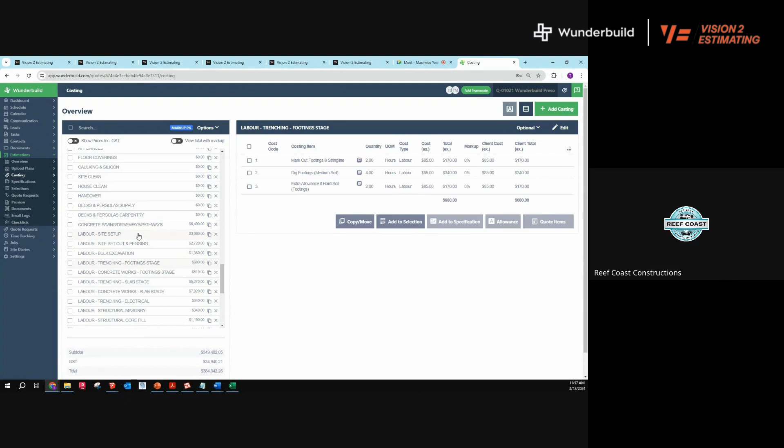When I import that, it's going to add all these categories to the bottom here. But see how every single one of these items is priced, because even though it's brought in the item name from that takeoff, it hasn't overwritten the task name or the costing item, and it hasn't overwritten the quantity item, but it's drawn the pricing from that one SKU code.

So I can go through the whole labor hour price list, and it's just used the one labor rate to price the whole thing. But what I've essentially done is built a task list with hours allowed for all the guys. I've also already pre-categorized the cost type as labor.

So it means that when it converts to a job, if you're using this labor type, guys can come in and assign their timesheet hours to these tasks as well. So this is set up to suit the way that our categories work.

Now, if you're a builder that already has all of your costing categories set up and think, oh, it's a headache now, I'm going to have all this data everywhere and I want to move things around and it's not the same as mine, but you like the idea of it being broken down, what I'm going to show you quickly is how inside the costing to manage things to basically build it the way you want.

So say, for instance, I already had a costing category called concreting works total. I'm just going to go concrete works and add that.

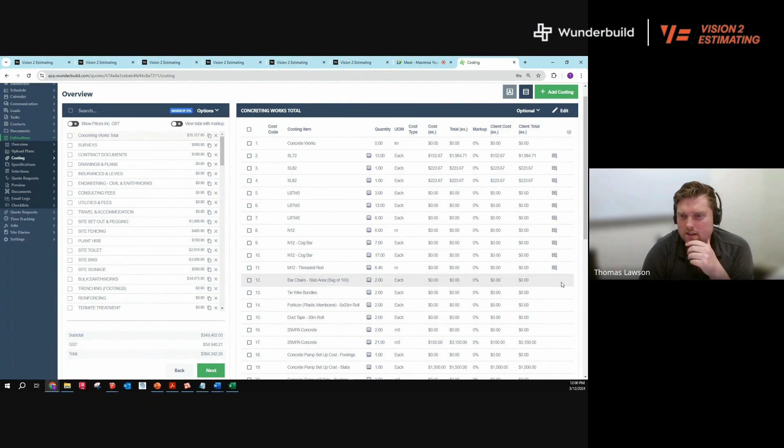So then I can go through and think, okay, inside this category, have I got a reinforcing quote? So I don't need these price items. Am I going to get the concreter to do it, working off his square meter rate and strip footing rate, or is my guy going to do it, or am I going to make an allowance for the concreter's rate plus some extra labour allowance for some of these tasks for my guys to help on site.

So moving it around means that you don't have to sit there and rethink and manually input stuff.

All from within Wunderbuild, what we've been able to do is take a CSV that's takeoff only, matched with SKU codes in my price list. I've been able to build my price list in the context of a job, so I can use it from every step on. I've been able to understand where my price is coming from by seeing the prices broken up into categories. I've also been able to move things around inside the costing overview with the click of a button instead of having to manually drag and drop, type things in, punch things in, or go back to takeoff.

So that's the overall of what I wanted to show of how that works with the estimating of Wunderbuild. But what I wanted to talk to you guys about is how we at V2E come up with this data. So those takeoffs that I showed you on screen and how that works with Wunderbuild, that's what our takeoffs look like. That's how we break things down.

But where do we get that data from? Where do we measure things from? So we don't use the inbuilt takeoff in Wunderbuild. We don't use Bluebeam or PlanSwift or anything to sort of manually do things.

What we do is we take all your sets of documents - engineering, your plans, site surveys, interior finishes, electrical layouts, all that stuff - and we put it together in a working 3D construction model.

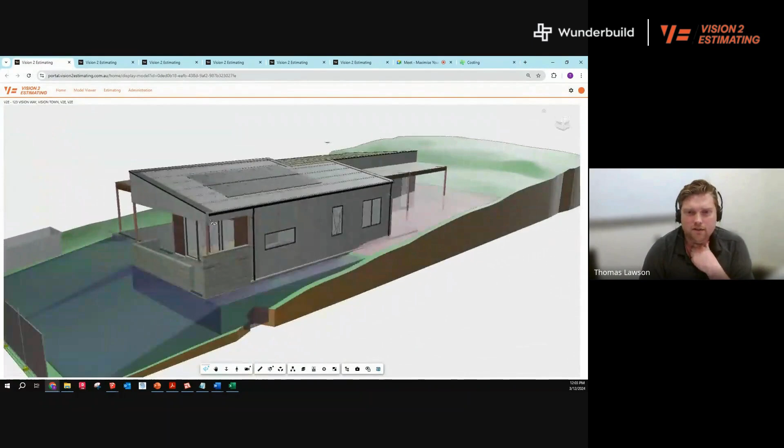So this is an example of that job that I just imported. You can see we've got the site in here, it sort of falls away at the front there. We're modeling in the temp fence, so that way we know how much linear meters of temp fence is coming in by drawing it in. We've got site bin and site toilet allowances, a bit of block work, some cladding, things like that.

But what I want to show you guys is what we've built into the portal is a way to be able to view items inside the model to relate back to the takeoff. What that means is you can, A, check for potential construction issues. B, use this as a reference to check how we've come up with the takeoff, because we can visually see it as well. But also C, use this as a way to explain things to clients that may be technical things to explain to somebody - things that clients aren't going to be able to pick up if you're trying to explain them on an engineering document or on an architectural plan.

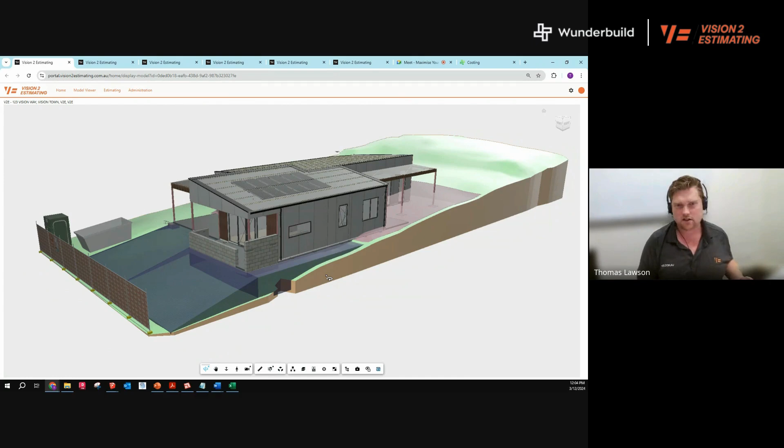So inside the portal, what we've got here is a few buttons down the bottom. The first one is this cost codes button. If I click on this, it's going to bring in all these categories that are related in the takeoff, which I just showed you guys before.

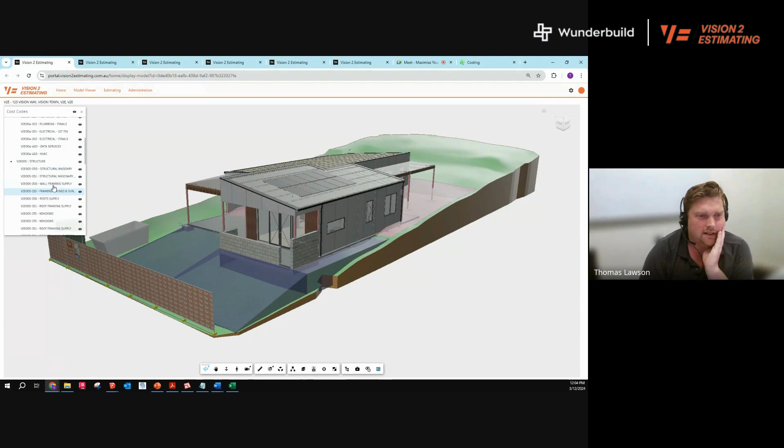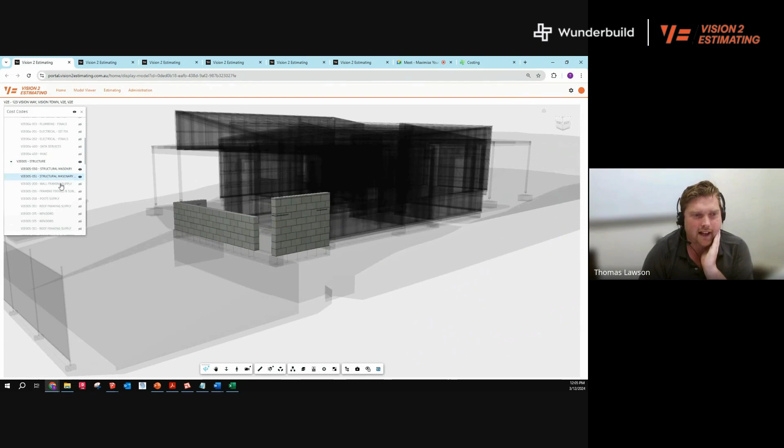So for instance, if I want to come in and check where something is - if I look at structural masonry, for example, so if I go to my costing and I've got structural masonry, so I've got block work and the sundries that go with it. If I want to see where in the model that block work is, I mean it's pretty obvious on this one, but what I can do is come in here and click on structural masonry, and that's going to snap the model to only show me the items that relate to that. So I've got structural masonry there.

What I can then do is open up the selection info button, and this gives me a bit of extra info for when I click on something. So if I click on that block wall, it's going to tell me what size block has been allowed for those walls.

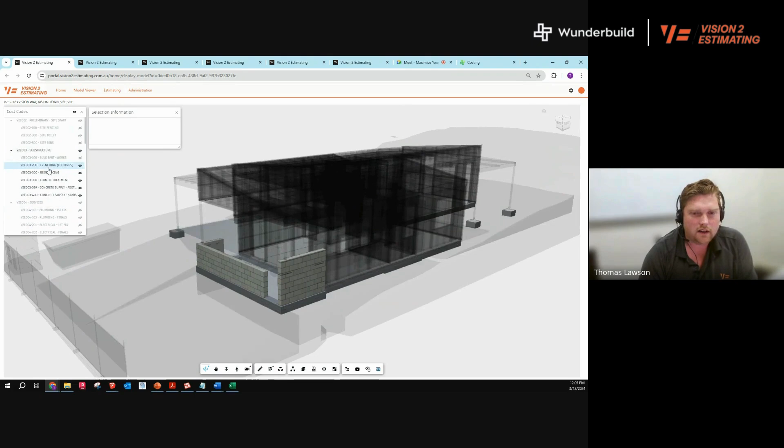So you can then start layering things to understand what the job is going to look like when I've got the slab down and all the wall frames built. So I might turn off my wraps. Now I can see slabs, footings, structural masonry, and all the framing.

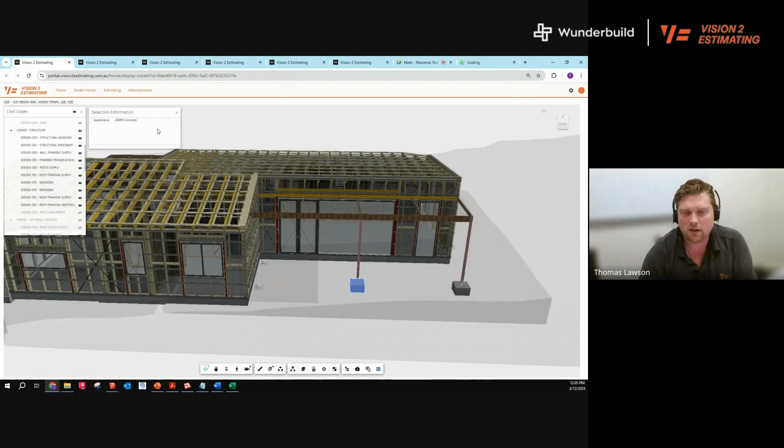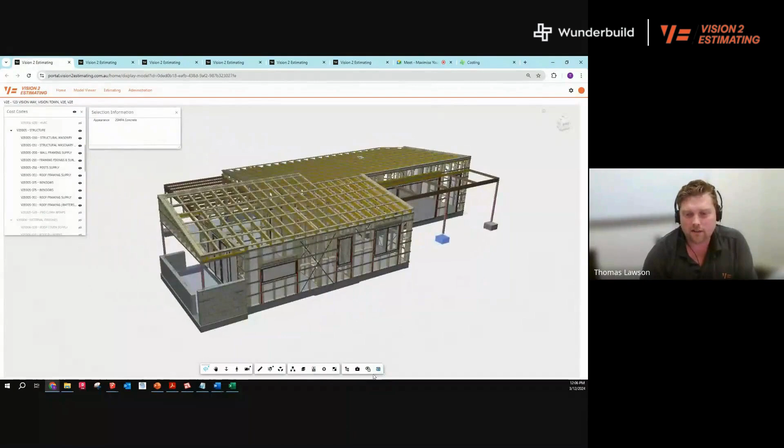What I can also use is this ghost hidden button, which means I can turn off that projection of the house to get a better view. But having the projection button there means you can be checking, all right, is this going to work within the context of the house? Does the rafter poke through the roof? Does the rafter clash with the window? Are the footings going underground as much as they need to? Do we have enough of a site cut allowed for?

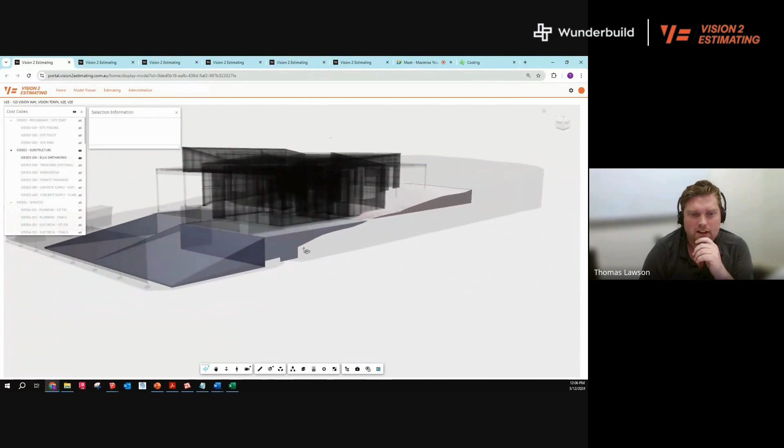This job's a great example. When we look at earthworks, because we model in the site fall and we model in the RFLs, we can work out with 3D the cubic meterage of total cut and total fill.

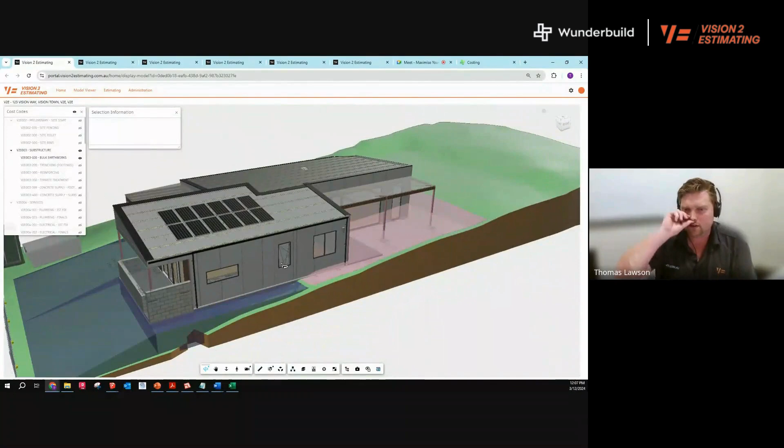So if I turn everything back on here, one of the key things we notice on this job is you're going to have to cut this job out. But on the plans we worked on, there's no mention of a retaining wall anywhere. I'm not sure how they're going to hold all that fill back, but that's definitely a talking point you can use to go, hey guys, I'm going to present this quote to you, but we've got an allowance for a retaining wall in here, because what I want to show you is the engineer or architect have missed that we're going to have to cut all this out, which means we're going to need some kind of retaining wall.

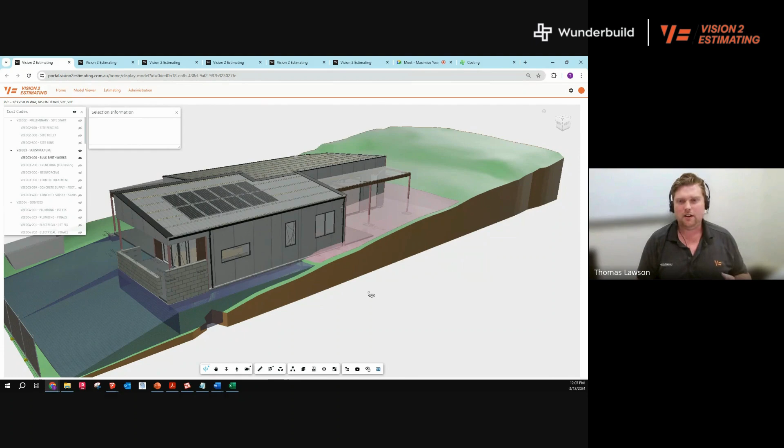So visually being able to show your client items that may be missed, items that may be high cost points that you might need to worry about, is going to make life so much easier for the customer when they can visually see it, rather than trying to understand a markup or a photo or an engineering document.

So I've got some other samples to show you. This model took us a while to do because we worked from hand-drawn plans. I'm not sure how many of you guys still work from hand-drawn plans, but this is a lot easier to understand what's going on than hand-drawn plans.

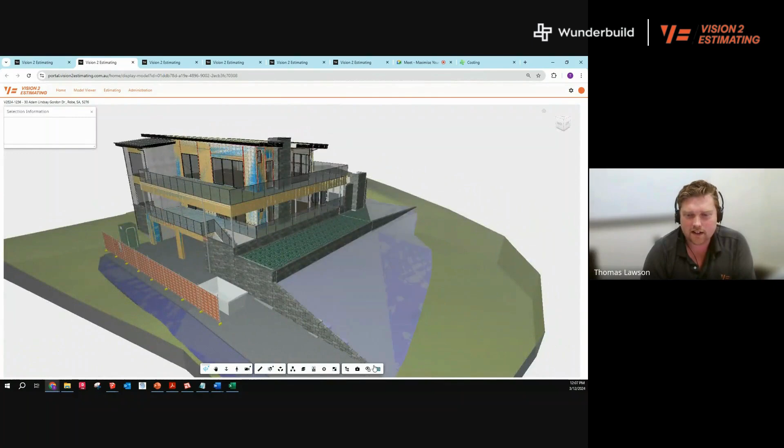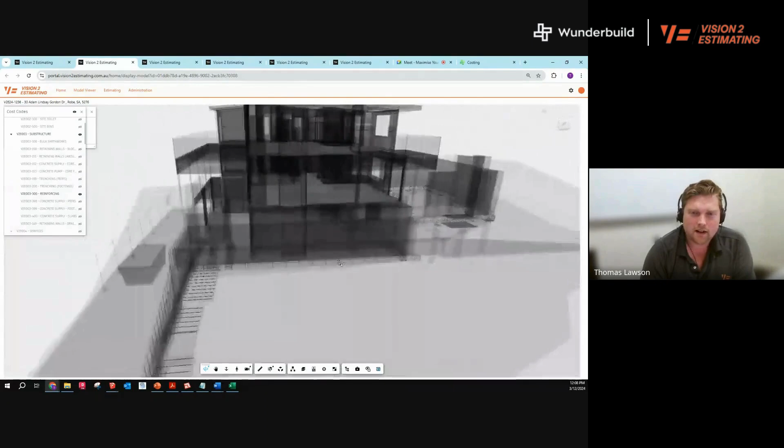Again, being able to use the cost code button to understand cut and fill requirements, to understand where retaining walls are going, to understand where all the reo is going into the job - being able to see the sheet mesh, starter bars, L bars and vertical bars all throughout the job, all the reo in the concrete staircases. Because the way that we draw our model in, that's how the measurement comes out.

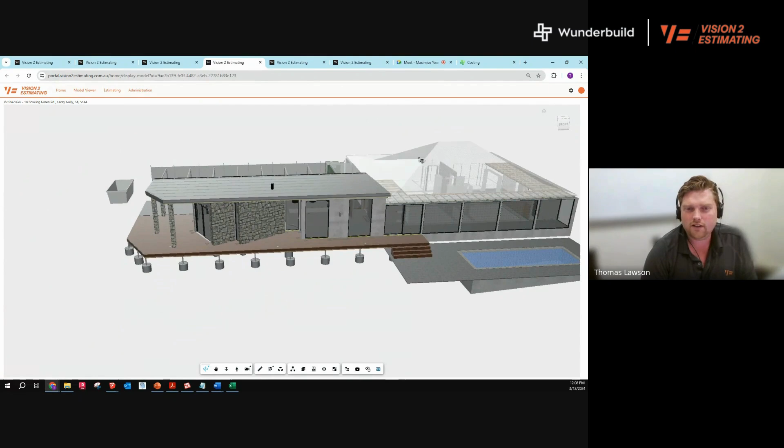And I've got a couple other examples of renovations or extensions - seeing how new sections are going to integrate with existing. Same here: new ceiling and new ceiling framing being installed to this section of the existing, and then a new addition put on.

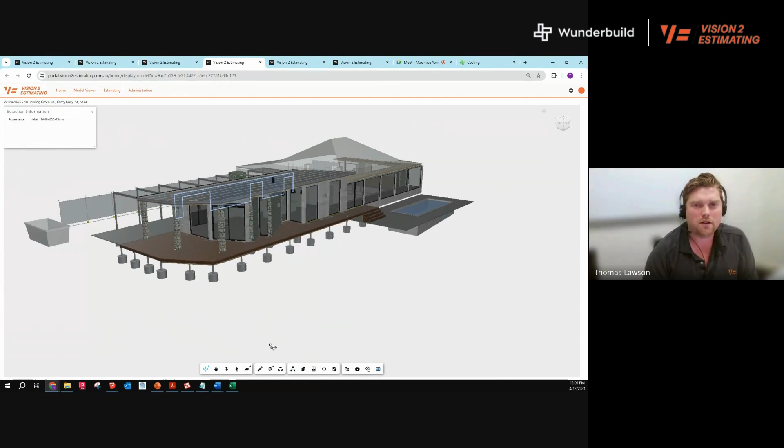One of the other things we've done in the portal is, with the selection info button, when you click on things like hebel panels or cladding, that section of wall is going to tell me what size panels have been allowed through that wall. So for the full height walls there, we've got 3.3 panels, but for the short walls, we've got 2.4 panels. Again, you've got a takeoff of all the panels broken down. Now you've got a model to show you what walls have had what size panels allowed through it.

Another example, just of different cladding types, timber versus metal. And then another example of an extension renovation going on to the existing.

Now, the other thing I wanted to show you guys in Wunderbuild that you can do with this model is, when we go to costings, if I wanted to build out my quote proposal template or my specification a bit more with some images, what I can do through Wunderbuild is come in and add items to specifications. So I might want to add concrete works to specification.

But maybe I actually want to come in here and just add the one line item, and I'll change this unit measure to each, across the job, say, and I'll update that.

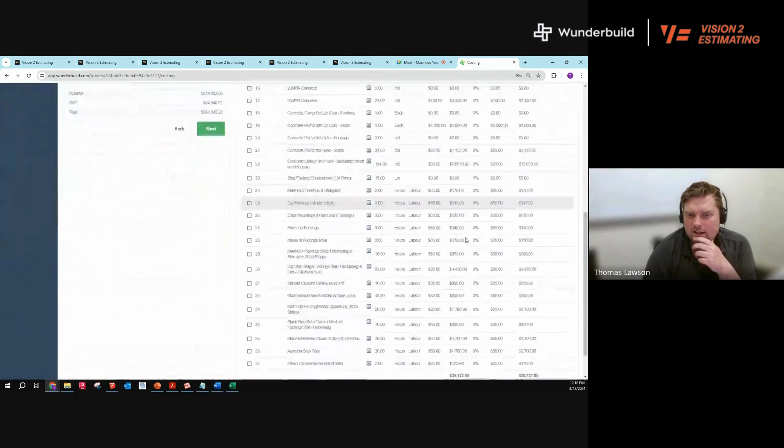If I wanted to add that item to the specification, now when I go to specifications, that item's in here. I can go in and edit. I've got concrete work, so I know where it's linked from. I can put a description: this is the slab and footings of the job as per the engineering.

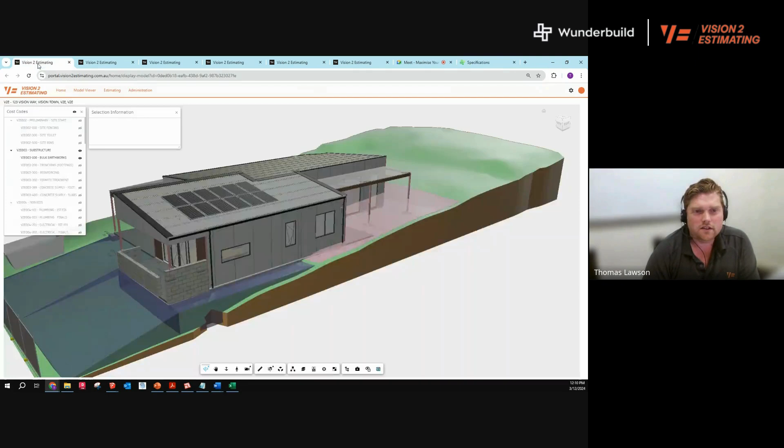Now, Wunderbuild gives me the ability to add an image to the specification as well. So what I could do is come in here and go, all right, I actually want to add the image of the footings and rio and everything from the actual property. So I might hide that area, turn that off.

Now at the moment, you can just take manual screenshots, but we are building into the portal to be able to automatically get images out of this to go into Wunderbuild. But I'll just show you the process to come in here and we'll go start.

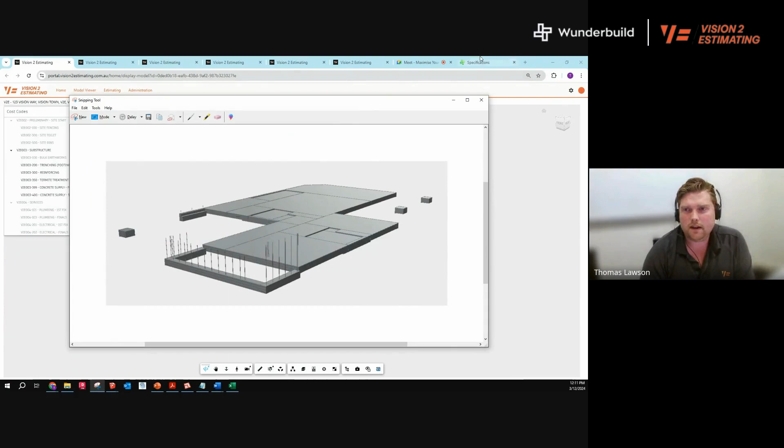Footings. Now if I go back to Wunderbuild, come in here, a photo, slab and footings, update.

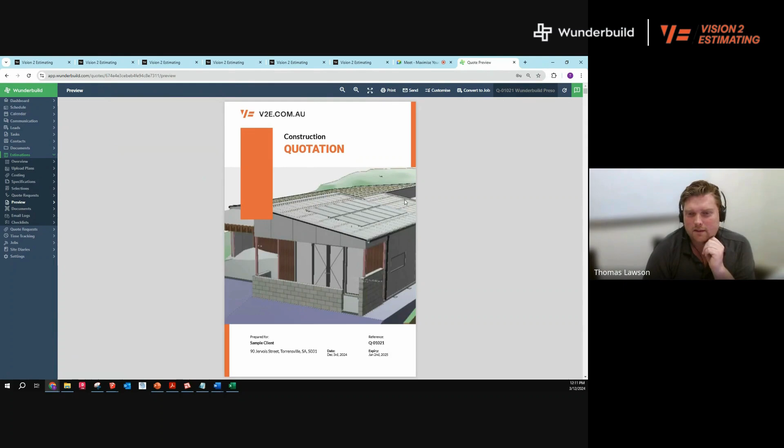So now when I go to my preview, if I have specification turned on, which I'm pretty sure I did, I can actually be presenting to the client an image of their house, photo rendered, all the items, and you guys through Wunderbuild can control how much detail you show, costings, line items, all that kind of stuff.

When I come through down to specifications, I've now got an image of the actual dwelling that we're talking about, footings and slab details there with the description there. So it's another way to personalize the quote for somebody by not just showing them generic images from Unsplash or Google or past projects. It's showing them actual images of their actual property.

So it's another way that you can help with sales, estimating, construction by using the model, takeoffs, all the way through using the costings, using your pricing data through Wunderbuild.

So look, guys, that's all I wanted to sort of show in Wunderbuild today, to sort of talk you through that process. We're sort of near towards the end of the allotted time anyway.

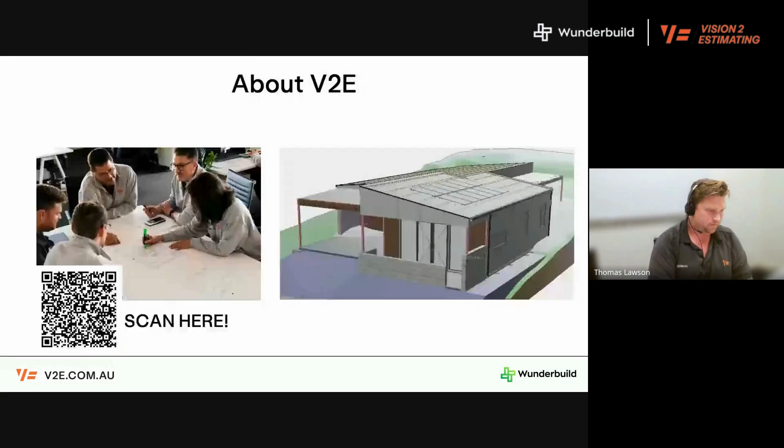And really what we're saying, guys, is you can own your pricing and improve and streamline the way you're estimating by understanding where your pricing comes from, those places we talked about at the start, how to manage it and interpret it by holding your own price list in your price book, how to streamline it by utilizing the SKU code function, the import takeoff button function, and by understanding in more detail what your project costing is by applying your rates and prices to a really broken down takeoff and costing.